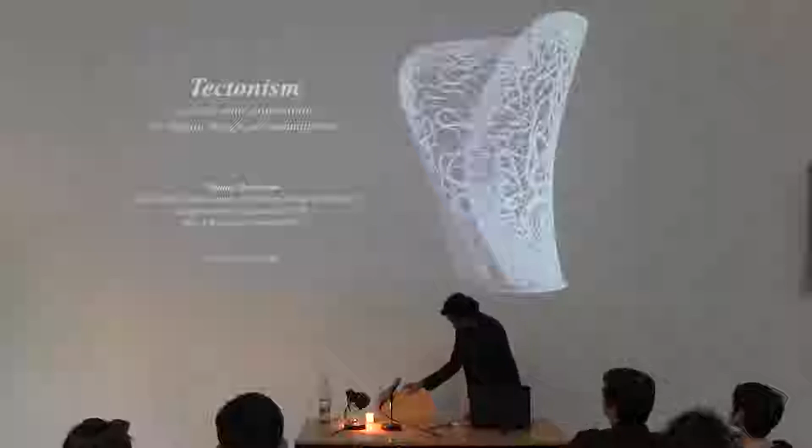Does this work? Yep. Thanks Johan for the invitation and also for being very accommodating to my erratic schedule. And thanks all of you for turning up earlier than your usual.

Hopefully this is the first of many visits now. As Johan mentioned, I was Theo's first student at the DRL when he was a tutor, before he went on to become director a year later. When I first met Patrick after DRL, he was on a sabbatical at that time, I was just happy that someone could give me a job on the things we were all really excited about, the early days of digital design in some sense. The discipline had already invested maybe 10 years by then, but I was just grateful that somebody thought I could even lead a team without being tested, and for that I'm always grateful to Zaha and Patrick that they have allowed me to grow and learn with the job.

So in many ways, all of the affiliations that I have since fostered, whether it's at the DRL or at Block Research Group or studying at University of Bath, stem from that desire to be a true polymath, in the sense which I think architects should be and traditionally were. A kind of polymath not in the sense of being expert in everything, but having enough knowledge to be able to orchestrate and talk to many collaborators and many disciplines that are necessary ingredients to produce architecture.

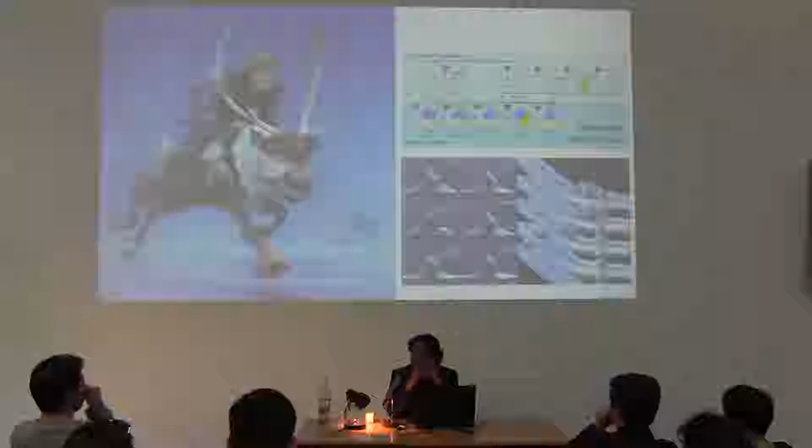And you can see over 35, 40 years of work, now any Pixar movie competes not only on the technological aspects. There's a lot of technology that goes into making a computer animated movie, but there's also a lot of storytelling aspects, a lot of emotional aspects.

And how many disciplines come together, many kinds of professions come together, and many kinds of constraints are seamlessly merged and woven together to tell the story.

So when you look at the movie, you're not concerned how the hell did they simulate snow. You're concerned mostly with what the story is being told, right? And likewise for lighting and so on.

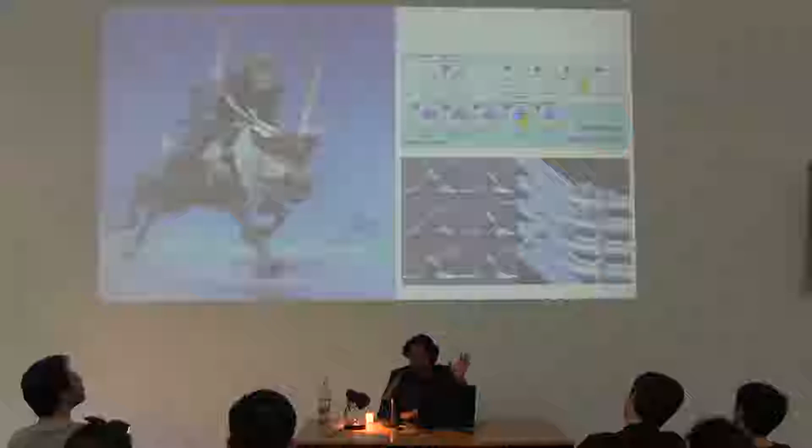So this is the kind of outlook that we have, or always had - this mandate to try and devote enough time to technology such that after some time we can suppress technology to privilege the social, privilege the storytelling aspects, and the delightful aspects of architecture, not just how things stand up and how things are made, but how people occupy spaces, how they navigate spaces, etc.

So in other industries also you can see this building on the substrate of technology, and when other industries have merged the social, there's been a disruptive change. For example, the automobile industry - Henry Ford and the Ford production line is legendary for how they organized the physical and how they organized the science of producing cars.

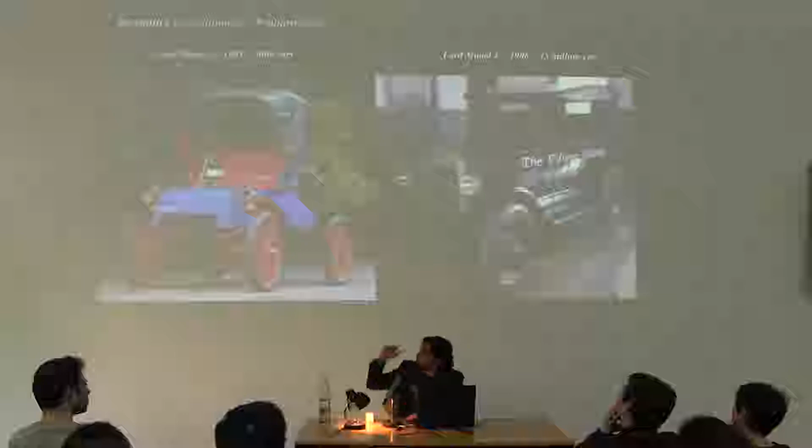Obviously, it is partly due to the production line and the assembly line, and also the service manuals and the service economy, all of these physical aspects. But also the genius of that endeavor was to position the car as a lifestyle object. It wasn't just a physical thing, it was merged into the social consciousness of people. It became something beyond just a vehicle.

So combining or positioning the car in people's lives has had effects we can still see today on our cities. Cities are dominated or planned for the car. Not to say that that's a good thing in the 21st century, but to say that by merging the technological with the social aspects, combining the production aspects with the consumption aspects, they've had disruptive effects.

Likewise, when you look at buildings produced by Gaudi and other architects of the time, they didn't try to promote these buildings as digitally fabricated or structurally amazing. That's not what Gaudi said. Even though underlying that is a lot of structural technologies of that time, a lot of computation, a lot of math, material progression, and fabrication aspects, like how to make instruments to describe things on site, how to cut stone, joinery aspects, and so on.

So there was already an economy of physical production, structural aspects, fabrication aspects, similar to our time now. We're saying digital design, digital fabrication, but if we realize the underlying production system is in place, and then if you're able to utilize this to begin to tell stories, to synergetically tailor our architecture to the social needs of people or consumers of architecture, we'll have a better chance of digital design being more disruptive than it currently is.

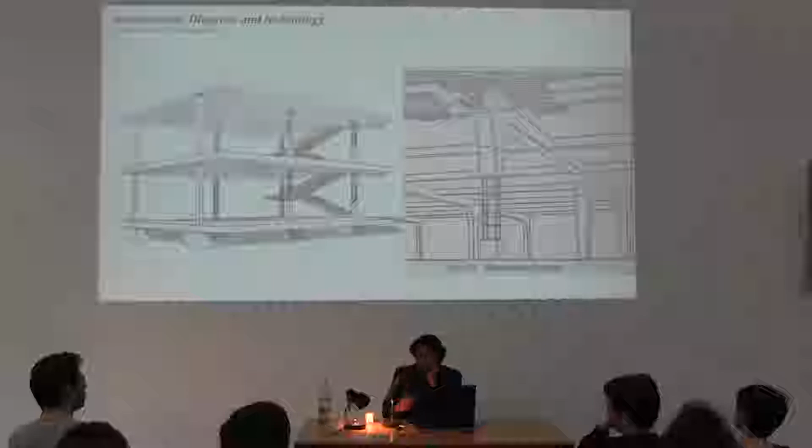Another person who clearly realized this is Corbusier himself. The phenomenal success of the Maison Domino as a diagram is also because it built upon technologies of that time, like the Hennebique patents on how to make concrete beams and columns and the entire concrete manufacturing system. But that's not what Corbusier tried to sell. He tried to build an architecture on top of the underlying physical science and physical technologies.

And lastly, somewhat of real heroes and sheroes for us are Ray and Charles Eames. They also early on invested a lot of time in the physical aspects, the material aspect. They bought this patent from the US Army about wet forming, steam forming of timber, and they installed one of these machines in their living room. They were a very materially based practice, but they were also invested equally in cutting edge digital technologies at the time, being one of the earliest adopters of Mathematica, or at least supporters of the software and that way of thinking.

But somewhere along the way, when they began to consider where that should go, when they designed the Case Study House or contributed to the Case Study movement, they realized that technology and the vocabulary of materials and techniques is only one part of a larger set of things that make up the puzzle. The other aspects are understanding of family, economics, production, servicing, distribution, and so on.

And we think we are at a similar stage right now, after 20 years or so of digital design and digital fabrication. We have a vocabulary of materials and techniques that we can now begin to apply to address more foundational concerns of architecture. So in that sense, that's why we think we need a language of architecture that is able to address these other concerns.

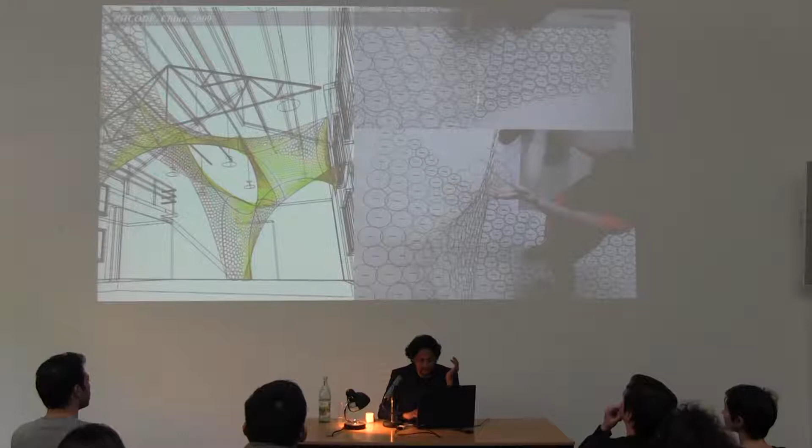Starting with the first aspect—a bit more scientific research into shell structures, digital design and fabrication—we started already in 2006 or so with this idea of digital fabrication. In 2006, digital fabrication meant a lot of manual work, meaning we assembled 2,000 of these circles by hand and stretched it together to make a formwork on which we intended to cast concrete. But we abandoned it midway because we realized it's better to do it in fabric. Rather than make our own fabric, we decided to use existing fabric and stretch it across bent pipes, then used that to cast concrete onto.

The benefit of this was that—and this was made with students and local construction help in India over a period of 10 days—complex geometries could be delivered on site, because the person who stitched all the fabric together did so in the space of this table. He had no idea what he was actually stitching. He brought the entire formwork in a small bag, and on site he stretched it, and by then the shape was already described, meaning the people laying the rebar reinforcements also had something to guide their work. So there were no real drawings made—the only drawings were for the unfolding pattern, and everything else follows from that.

So it's a kind of digital fabrication, but in many ways one of the key principles we realized is to simplify how things are described on site. If digital fabrication requires thousands of drawings, it's unlikely to be made. We did learn quite a lot about geometry and other aspects, which we continued. Around a similar time, a scaled-up version of this was already being made in London—bent steel pipes, more engineered, more structurally calculated and properly digitally fabricated. But the underlying principle is the same: you bend some pipes, stitch some fabric, and stretch the fabric into place.

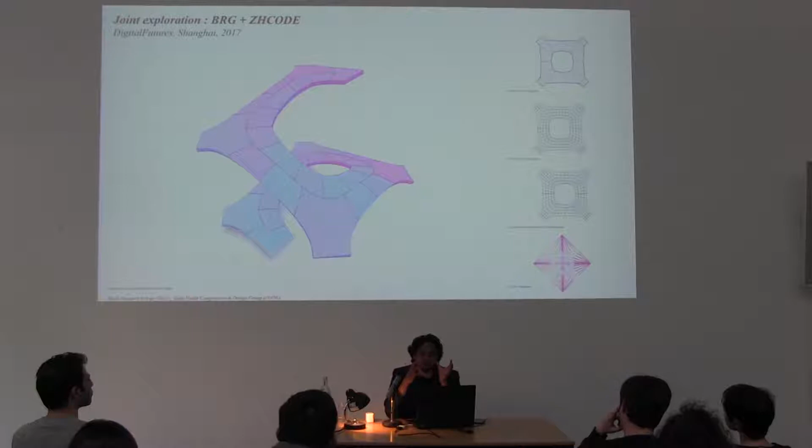As I mentioned, his PhD and his work relate to using computers to upgrade the same kind of techniques and tools people like Gaudi were using in the 19th and 20th centuries. The difference is these historically accumulated methods are very geometry-based, meaning you can calculate structural performance using just a compass and a ruler.

So it is very intuitive in the sense you don't need deep mathematical calculations, because it already accumulates all of that into a geometric way of calculating structure. So we see a greater synergy between the language we were developing with curvature and geometry-based language, and these geometric ways of calculating structure and enabling digital fabrication or processing of geometry.

And there's also deeper synergies with these physical models. You can see, with scale models, if this one falls, we know for sure the bigger one is going to fall too. So in that sense, these are not representational models, they are actually scalable models, and eventually that model did stand.

We're yet to build a fully scaled up version, but these are explorations by students. This entire model stands up not because of glue or anything, but because of the string going around the boundary, holding everything in compression by tensioning the boundary. So if you cut that tension tie, everything falls down, similar to the previous model.

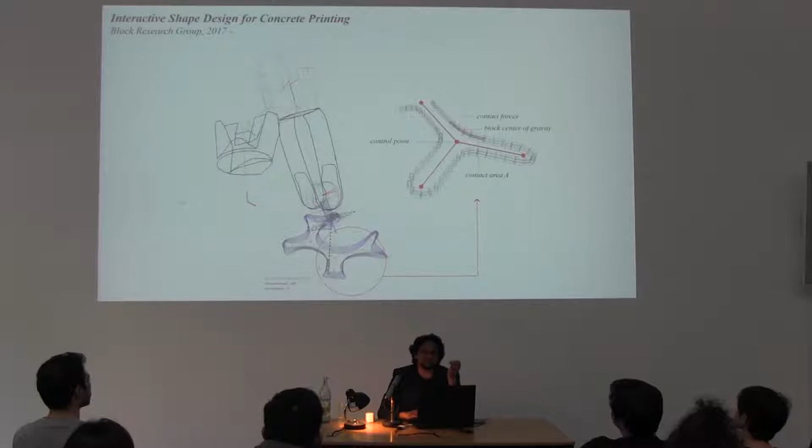Similarly, with 3D printing, we've been trying to explore this idea of how do you develop an intuitive way to compute structure and fabrication aspects. So we're saying, if you think of 3D printing as a scaled-down version of masonry, if you think of all the layers of concrete as scaled-down bricks, you could begin to capture some of the intuition that comes with assembling bricks.

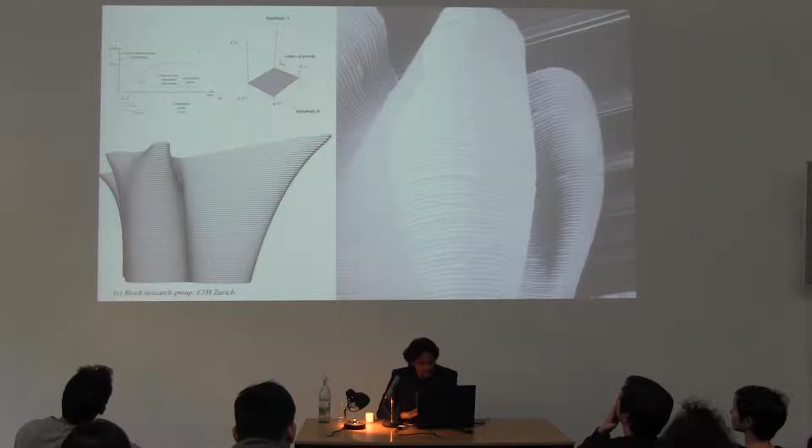We're trying to adapt methods from historic masonry construction to something as new as concrete printing or other clay-related materials. These are early prototypes, to see how far we can push this analogy between brick building and layers of concrete.

Alongside, we are also discovering new operations that the computer can add to this mix, allowing us to make more complex shapes which nonetheless retain some of the intuition of masonry construction. If you think of Nubian vaulting, where you lay bricks layer by layer, concrete printing is basically the same thing, just done by a robot in some sense.

We've been doing similar fabrication-aware or structure-aware geometry for other kinds of fabrication methods. This is printing in plastic, where the underlying shape is cut by a robot, the formwork is assembled, and then you print on top of the formwork.

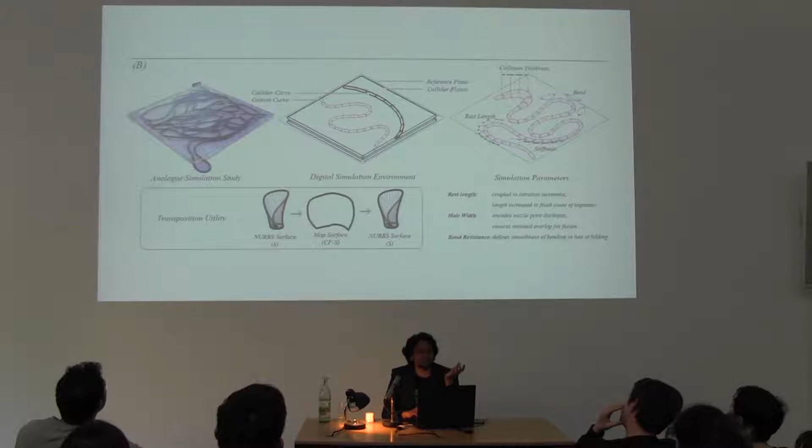Again, we try to do physical tests, and when you do that physically, you're able to devise a computational workflow that captures some of that intuition, so you can build very quickly more complex things from very simple initial experiments. We were then able to use robots to do the printing on top of the formwork. So all of these complex workflows we put together start from a simple physical experiment.

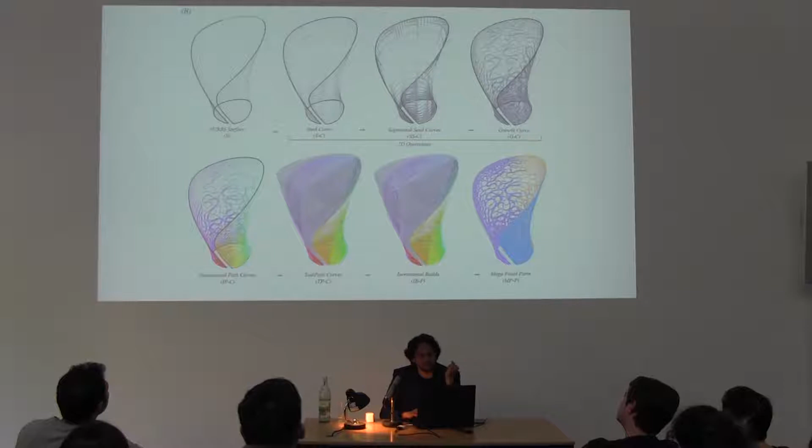And this is how the robot then printed on top of a form. You can see the forms were hot wire cut, hot wire cut by a robot, and then the printing was done by another robot on top of that formwork.

You wouldn't have seen that it is a complex process like this if you just saw the shape. That's our intention, to make it seem seamless. And this entire project was done in a space of 3.5 weeks, and the hot wire cutting manufacturer was in Denmark, the 3D printing manufacturer was in London.

There was not a single drawing made. Things were just hopping from one computer to another, from one robot to another, and that's one of the key aspects of digital design and fabrication. You have to orchestrate and manage all of these exchanges between machines and between people.

Similarly, for 3D printing at a smaller scale, in this case, these patterns have a structural meaning. And this utilizes a technology called topology optimization, which basically reduces material from where it's not needed. Similar to our bones, it will put material where there is more use and more structural stress, and remove material from where it's not needed.

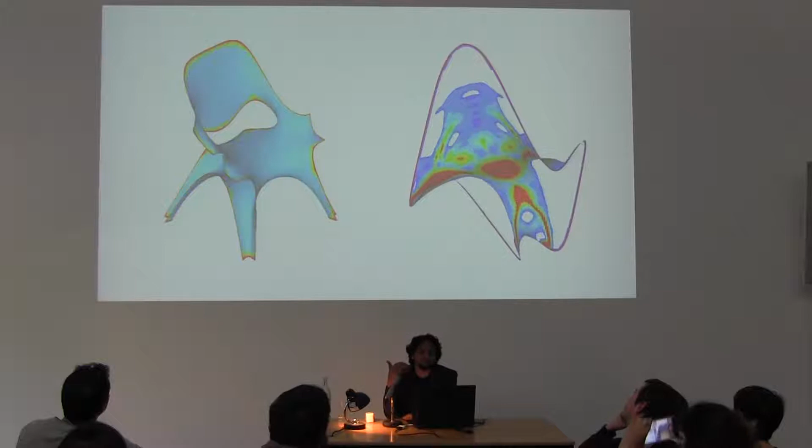So in many cases, you can remove up to 70% of material for the same structural strength. So you're basically making a lightweight version of the same geometry. So in the previous images, we wanted to highlight these things and to develop an aesthetic language around these optimization and fabrication processes.

And similarly with origami, we've been doing sheet metal manufacture, trying to rediscover historic techniques in origami, curved origami in this case, not straight line origami. So the principle is exactly the same. Instead of a straight cut, you put a curved cut, and you can get curvature for free.

And this used to be taught in the Bauhaus, and even historically in many of the construction schools. Currently, a professor at MIT is exploring how to computationally and digitally recreate these processes.

So equally, mathematicians are interested in origami, David Huffman on my right, and artists are interested in this discipline, like Ron Resch on my left. So these are kinds of disciplines and endeavors that we're very much attracted to, where there is not only science but an art aspect, and so both kinds of explorations are synergetically contributing to the progress of that tectonic language.

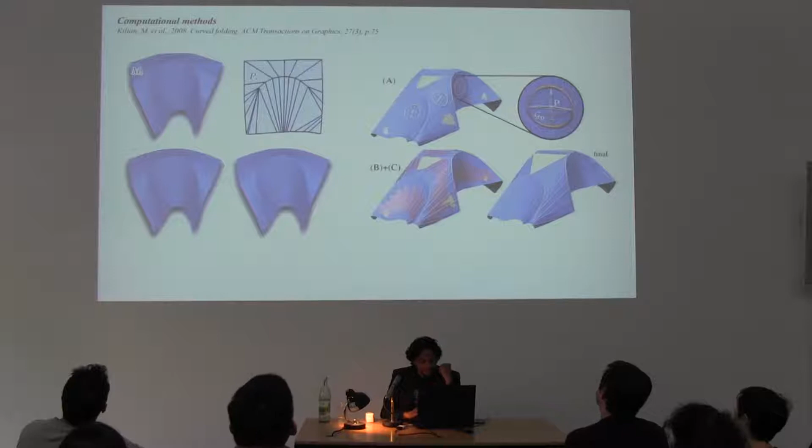But the simple idea is this: you have to capture this intuition. You cut away material or put some lines, score paper or metal, and you fold it. And as a designer, within half an hour, you can create all of these varied shapes, which already incorporate how it's going to be physically made. So the shape has not only structural meaning in the fact that you can fold it, but also physical fabrication meaning, in the sense that you can scale these experiments from paper to metal, which is what we did.

Again, with students, each of these eggs was put together in a matter of 4 hours, and all we needed was a laser cutter that cut sheets of metal, and you fold them together and assemble these kinds of shapes. And of course, there's a lot of computation involved, but we want to suppress those aspects and capture the intuition of physically working with these.

So I did my M.Phil on this topic of curved origami, to try and capture some of these underlying production systems associated with origami, and therefore we were able to put together a kind of workflow to create this large installation for the Venice Biennale in 2012.

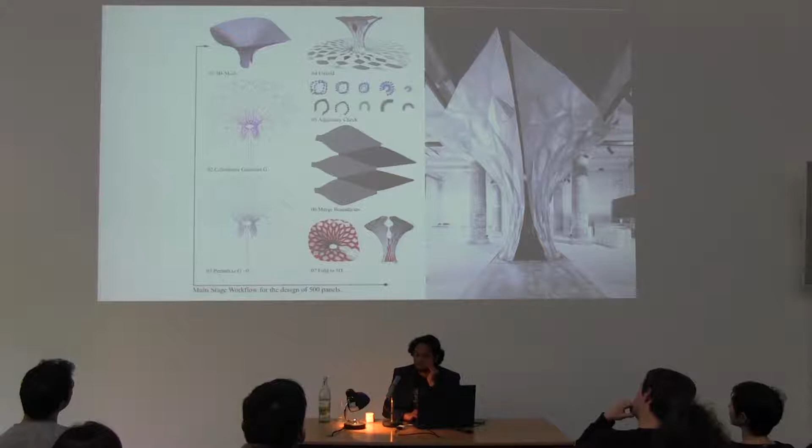It contains about 500 panels, which are all curve folded and assembled together. What you don't see in that simple structure is this complex digital design and fabrication process that has to be managed seamlessly.

So that's curved origami, and likewise we've been doing new things exploring stone manufacture with carbon reinforcement. So the black is carbon fiber and the white parts are stone.

Again, this combines tectonic ideas coming from the Wegner chair, and also structural ideas coming from the tension experiment that I previously showed. So this structure is held up only because of the tension tie that goes around the boundaries. So if you cut that tie, everything comes down.

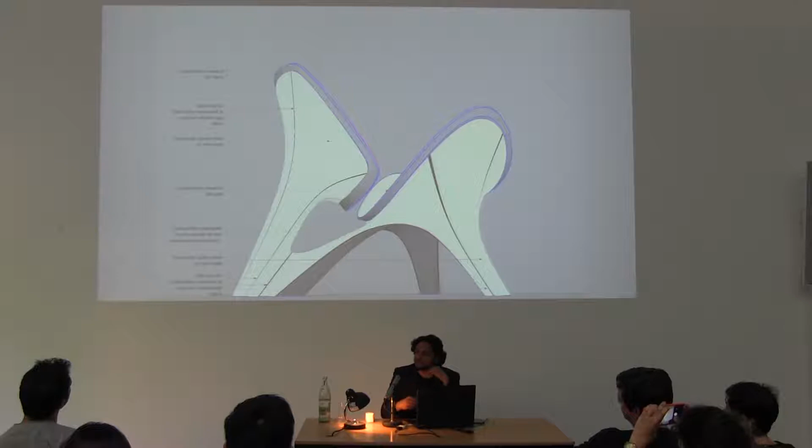So we've been exploring these kinds of ideas of manufacturing and structure, and how we can synergetically combine that into a kind of aesthetic language, to heighten and physically express these aspects of structure and fabrication.

So you can see those cut lines are not arbitrary. They're there to heighten and express the structural flow of forces. And the carbon fiber is on the inside where there are tensional forces, and the stone is on the outside, which is good in compression. So that's the kind of exploration that we like to conduct.

Similarly with this pavilion, lots of manufacturing constraints, spatial constraints, aesthetic constraints, so on and so forth. But what's interesting about this is just one person from our team is able to manage all of this complexity. So just to highlight that things are maturing so quickly, what used to take entire teams and months of research and development are now being done in a matter of weeks and by smaller teams, meaning we can do something else with our time.

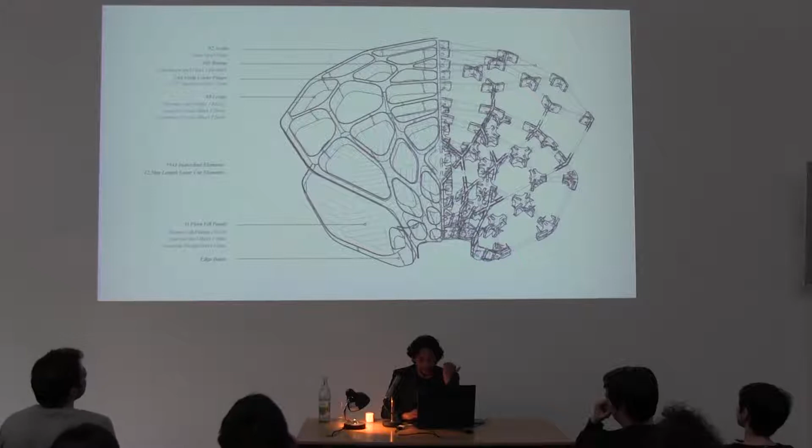Again, some of the structural simulations, and also how to make sure everything can be unfolded, so you can bend the steel skin onto a steel underlying structure. So there's a lot of fabrication complexity which we want to deliberately kind of seamlessly hide, but heighten other aspects, the shape aspects, so on and so forth.

And again, even to this day, digital fabrication still means a lot of manual work. So this was produced in China. The first version was produced in Germany. The second and third versions are being produced in China.

So all of this, in many ways, these experiments and prototypes are deliberately not acknowledging the architectural side of things. It's to suspend disbelief, that once we get those aspects under control, we can begin to address more architectural concerns of program and spatial aspects and so on and so forth. So this was...

One of our first major projects for my team, which unfortunately is currently on hold. We started design work on this already in 2013. We've kind of tried to heighten all of these aspects of structure and fabrication and ornament, as I mentioned. Behind the scenes, there are all these computational workflows, ideas of BIM. It would have been, if it were completed, one of the prime examples of digital design and fabrication maturing.

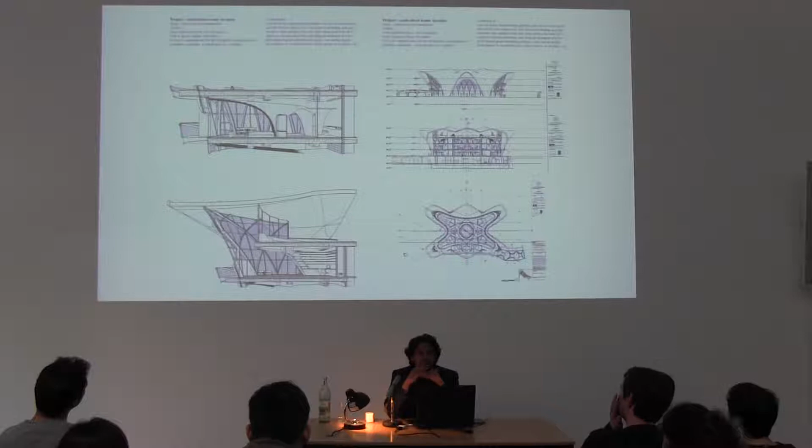But regardless, the status quo, regardless of whether projects like those have been manifested, is this: research units like ICD in Stuttgart, or Philippe Block in ETH Zurich, or CITA in Denmark, all these places are already knocking on the doors of doing these kinds of pavilions in time-efficient ways and financially efficient ways. So there's also a kind of new aesthetic associated with these digital design fabrication methodologies.

So in other words, you see more of these pavilions pop up across the world. It's not only in these elite, state-of-the-art research institutions, which begins to beg the question: how can we apply some of this research into commercial projects? Like we did, again, my small team of 4 or 5 people worked on this gallery for mathematics.

Which we completed, and which we are calling an interim result, because it's an interior application and it's a small gallery of 1,000 square meters. But regardless, it was managed by like 5 people, and since the time it has opened, it's already invited like 1.2 million people to the gallery for mathematics. That's quite a lot of people.

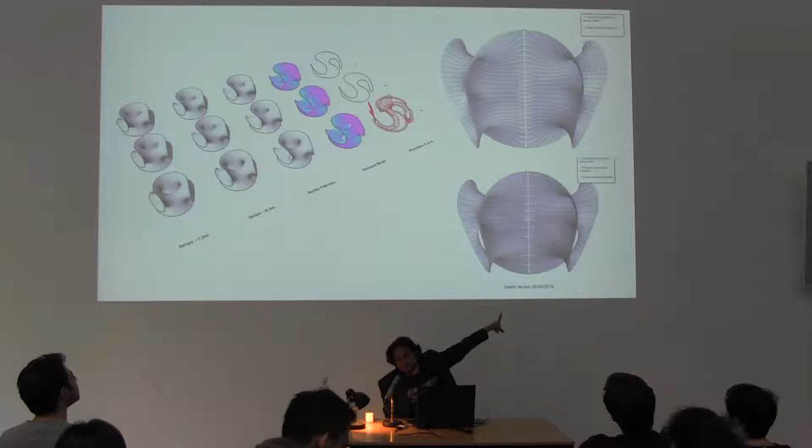So the fabricator originally proposed this kind of fabric layout, which we found ugly. Because we had made a previous physical model and had all this prior research, we could propose to the fabricator and the engineers that we could actually make the seam layout as described in the image above. The final layout was like a negotiation.

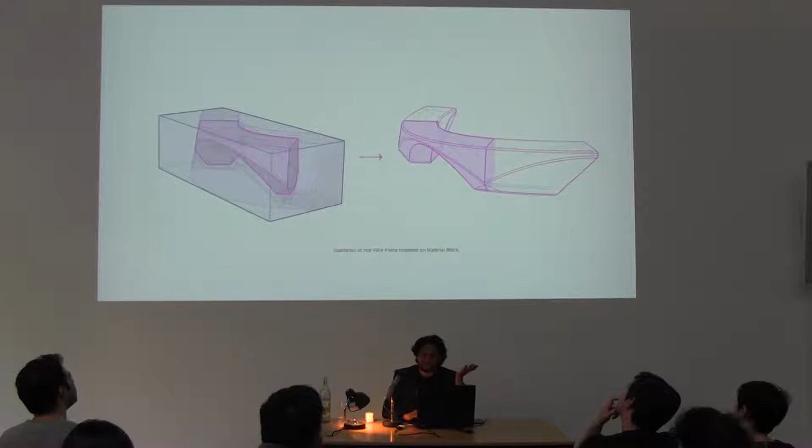Likewise, for the concrete benches, instead of stone, it inherits a lot of stone cutting techniques, but instead of stone we use foam, and instead of human labor we use a hot wire cutter or abrasion wire cutter. The logic is simple: it's upgrading historic stone cutting techniques using a block of foam. You use a hot wire cutter to cut away everything that's not the bench.

These are the various cuts from a block of foam until you get the bench. Then the foam is cast and the concrete is cast on top of the foam, and all the pieces are assembled like so. There were 16 odd benches in the gallery, each made by one designer, a few fabricators, and lots of robots.

This highlights the distinction between traditional means of production, which means you have to invest a lot of upfront design time, but the actual production processes are much faster.

So those are the benches that got made, and we're particularly interested in exploring this kind of tectonic or geometric language. Those cuts are not arbitrary, those curves are not arbitrary - they're there for either structural reasons or for fabrication reasons. So here's both of them put together.

So to conclude then, this kind of project-independent technological research allows us to do many more projects, right?

So we did this as a small gallery installation where the fabric comes down wherever people are not there, enclosing them. How do we measure where people are? We just track where their feet are - there's a laser that scans people's feet, and that's how we dynamically bring down the piston where people are not there.

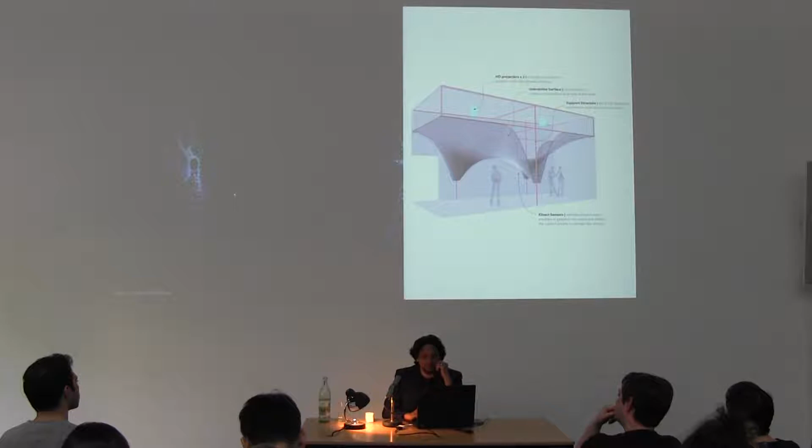It was reasonably successful - reasonably because it was small, and not many people actually saw it because it was on the side of the main exhibition.

But we felt confident enough to use this similar technology to manage the stage for Così fan tutte, which was our contribution of stage design for the LA Philharmonic.

So for every stage of the opera, some parts of the fabric would come up and down, and the actors and singers would walk around on stage. This was in the US, so you can imagine the kind of health and safety nightmares you had to go through.

Likewise, we feel so confident about these technologies now that we proposed a kind of school for refugee children. Unfortunately I cannot tell you where it is for political reasons, but the idea was that we would develop all the digital design and the shop drawings and hand it over to the local fabricator who can deploy these schools across the region. This project is kind of held up because of political reasons, but we felt happy enough that at least some children were able to use these spaces before the winter came.

So again, to highlight that technologies are advancing so quickly, and that most offices have a good handle on all the complexities of digital design and digital fabrication, we can begin to address other social causes now. In other words, it's a period for asking what else can we do with this stuff? What other questions can we ask?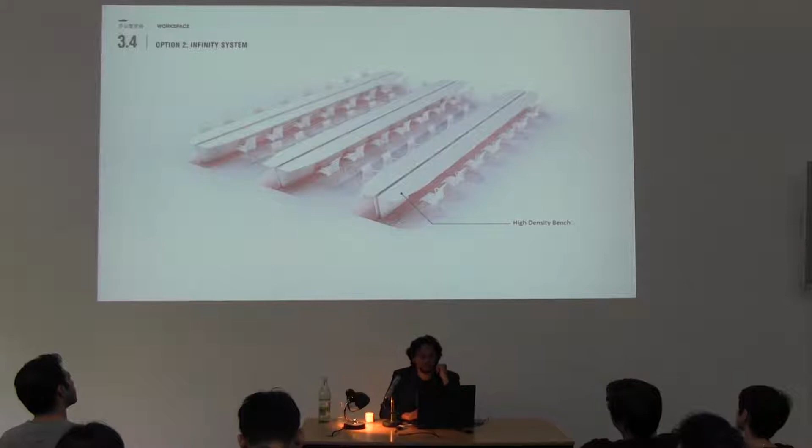So in office spaces of this completed project, we are now going back and beginning to measure office layouts, like how can we design flexible office layouts to account for meeting spaces, dynamically rearrange meeting spaces, and also address relationships between people within a team. So how can you design furniture to address how teams work and not work?

And where? So we're also beginning to measure from where you sit, like how many people can you see and how many people can you actually interact with. And we've already developed the language of curvature.

We're now beginning to measure socially what is the performance of this curved language. Previously we were saying curvature is good structurally, curvature is good for fabrication, and now we're beginning to say, once you have this language, how can you then use it to organize office layouts or spatial layouts? We are finding that curvature definitely offers more degrees of freedom to organize these kinds of social, organizational layouts.

Again, these are the lower hanging fruit, obviously, because it's easy to measure these kinds of things. The other pet project for us is this idea of housing, not in the sense of affordable housing alone, but the social aspects of housing, meaning communal aspects of housing, and how can you computationally study how communities operate. So this is work with students of ours at the DRL,

where one student team decided to address these communes that already exist in London. There are 4 or 5 of these communes of artists and manufacturers and other kinds of vocations.

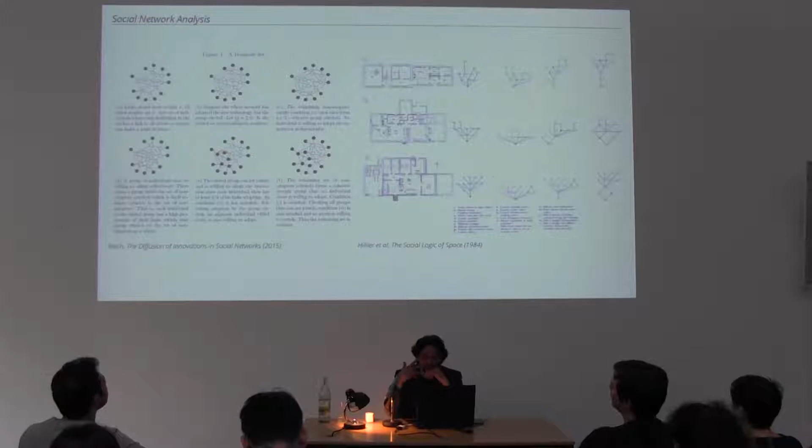And to that, they're applying the science of social networks, like Facebook, which is in the news for all the wrong reasons currently, but you can use the underlying social technology and analysis technology in a positive way as well, combining it with the historic work of Bill Hillier and others at UCL, who understood physical networks using the same mathematics, let's say. So how do you bring social networks and physical networks together?

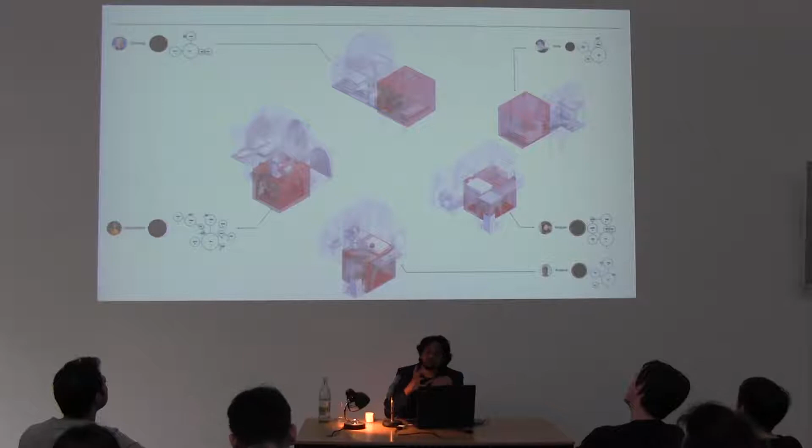So this particular team mapped out a few people in a given community and then tried to design spaces specifically for that community. So to computationally investigate social networks and then produce physical networks that harmoniously house these people. The names are changed, obviously. So again, applying the same rule-based, computational way, not only to address the physical aspects, but now to address the social, relational aspects.

How do you position people? Where should someone's house be? This used to be a very central task of an architect - how do you organize social relationships in villages? Like the head of the village would be in a certain place and so on. So it's not to say there needs to be hierarchy, but there is a relational marriage between the social structure and the physical structure of spaces.

And obviously they're trying to combine technologies of digital design and fabrication with the social side. So this particular team was trying to build on the ideas of clay printing and concrete printing, whilst also progressing the social analysis aspects. And these are the hundreds of studies that they did on the physical side.

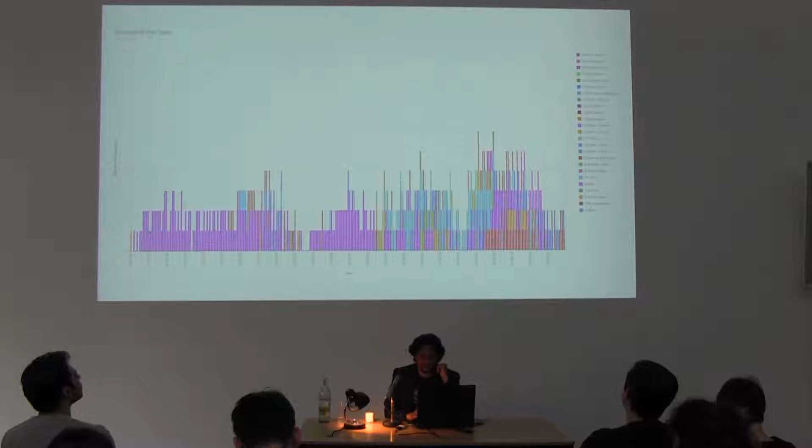So we are also collaborating with a housing developer slash provider, and trying to see which parts of their buildings are used when, how often, so on and so forth. You can see there's event space, kitchen, bistro, cooking area, play area, and so on. So we are beginning to collect this kind of data to know whether you actually need a living room or not.

And what's more important is to then visualize or make use of this data to say, how do you promote more engagement between people? How do you ensure that the architecture you propose allows for greater interaction between people? So we are trying to say, if a person's daily schedule is A, B, and C, and he or she has to go between these many rooms, can we force intersection of these paths? Can we force people to accidentally discover each other by the way we arrange these spaces? So that's the kind of intention. This is still early work, but that's where we're going.

And we're beginning to also address more developer concerns, like how do you then sell these things, and so forth. But at the same time, we're trying to utilize all the language we've previously developed to combine with these kind of data studies, because data on its own doesn't mean anything unless you physically manifest it in some sense.

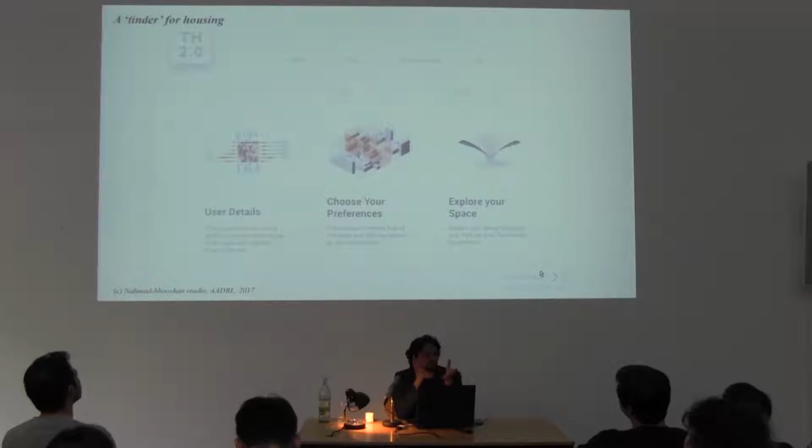So the ultimate aim, I'll leave you with this video, is to make a kind of Tinder for housing, where you not only are able to choose your house, but you can also choose your neighbors, which is more important in a social sense. Most people would like to live with their friends, obviously, but in contemporary cities, if you are buying a house, you have to buy where things are cheapest.

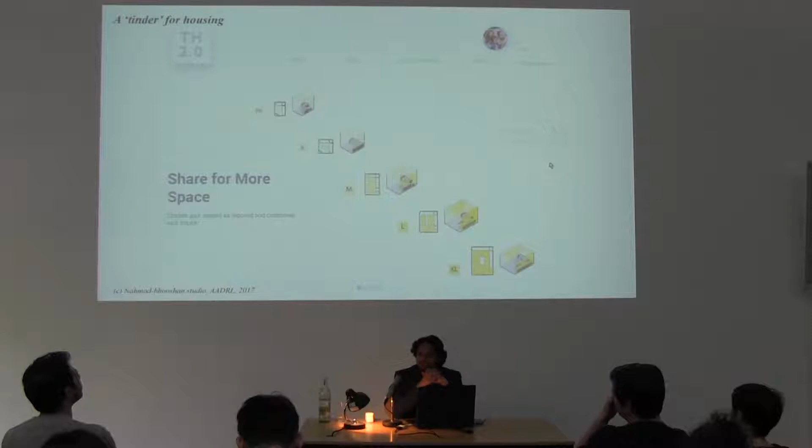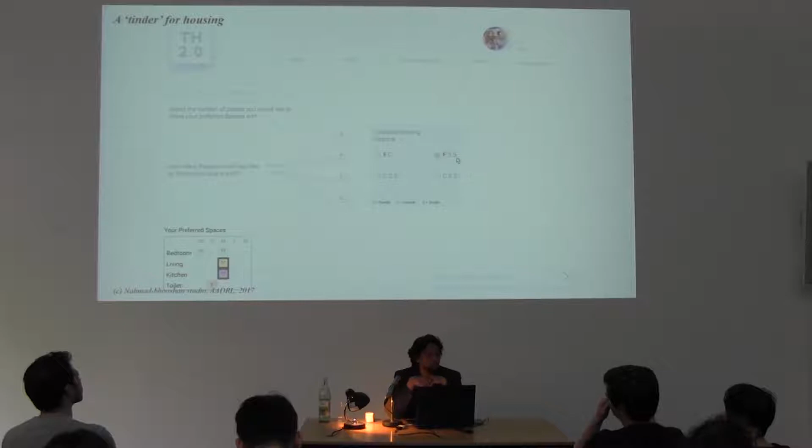So we see affordability in a slightly different way: you should be able to afford to live with your friends, and how can we utilize and leverage technologies of data and digital design, digital fabrication, to actually deliver social housing of this kind. Not social housing from the post-war times, when social housing meant mass deployment of prefabricated units. Here we are saying customized units, customized to groups of people, and so on. So that's our hope. I'll leave you with this video.

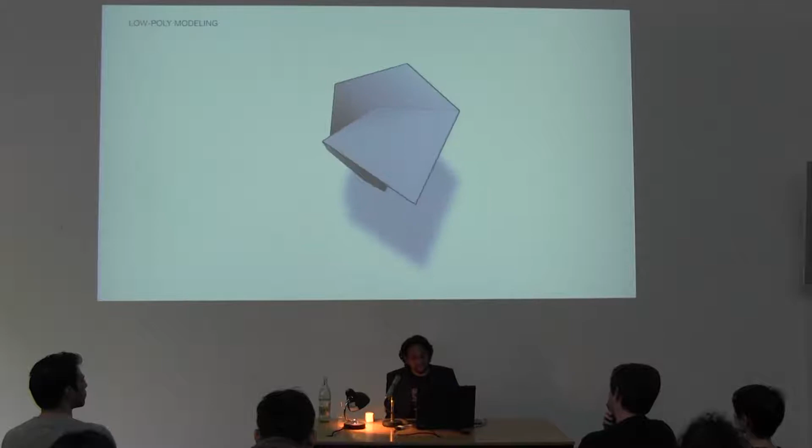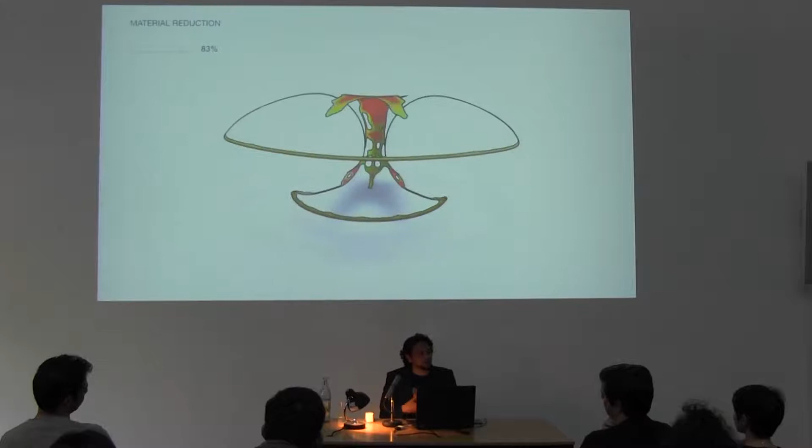Thank you very much for the question. Definitely we think that digital—people, society in general, are not so comfortable with the digital realm, and there's anxieties about robots, anxieties about AI, anxieties about data. And there's a kind of backlash to say, oh, we want buildings the way they were built 100 years ago. But we think the answer is not to go back 100 years, but to look at what happened 100 years ago in terms of principle, and to position digital technologies in a way to address social concerns. That's definitely what we want to try and do, to address the utopian questions again, because there's a lot of cynicism that has crept in, which is not necessarily true of the technologies per se. It's just how it got implemented. For every bad Facebook story there could be a positive story of using the data, and you can obviously keep it anonymous, and privacy matters can be easily addressed.

We think people are willing to give up data and contribute if they see the social benefit of it. If we can say we can leverage all of this technology to help people live together, live with their friends, at least we think there will be some set of people who will want to try this as an experiment.

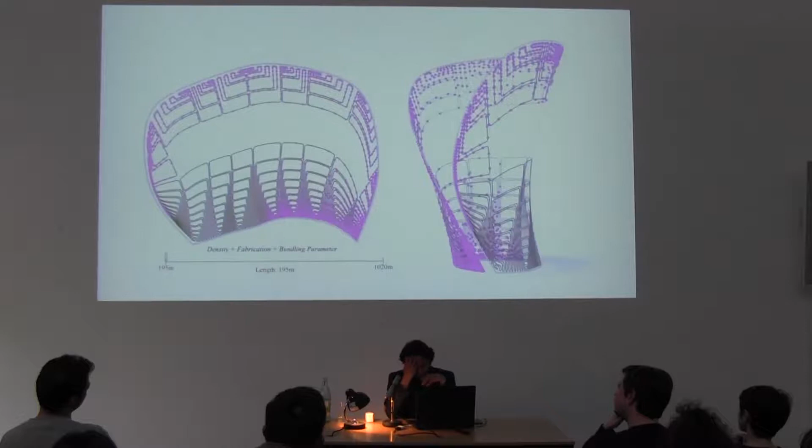We don't know where that's going to go, but in some sense it's not so utopian, because in cities like London it's already happening, where developers are building rent-only housing, and what they give in return is like a kind of membership, like you get a gym. If you're a startup company, you want to live where other startup people are, because that's where you'll find your collaborator. You're not going to find a collaborator living outside the city. So that kind of housing is happening, where people are going directly to startup incubators and saying, you already put these people together and they're working together, so why don't they live together? It's kind of like co-work has also mutated to co-live.

That's the social phenomena that's already happening. And we think if we don't ask the utopian questions, that's going to end up in another kind of Facebook nightmare. So we think we should ask the first principle questions, otherwise we might leave the door open for cynicism.

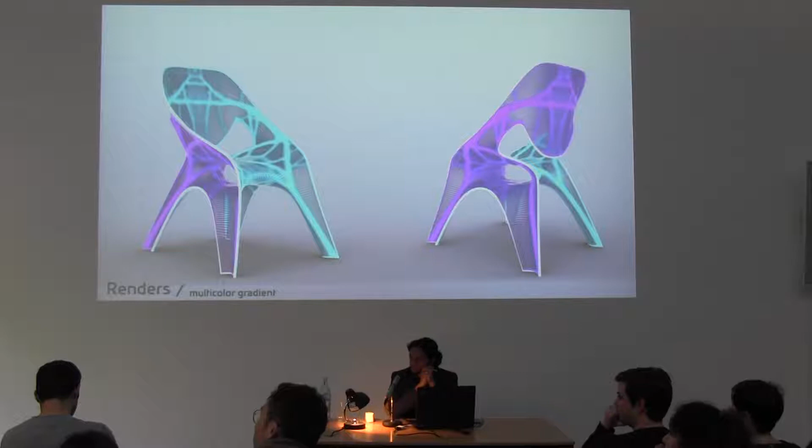How important is context in designing housing, for instance? How do you bring vernacular architecture together with computational design?

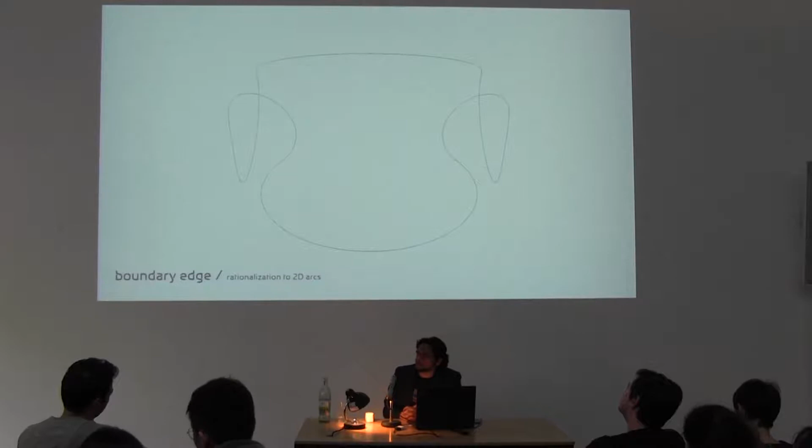For us, ideas of vernacular are somewhat abstracted to these principles of structure and material, and environmental aspects, and also social aspects. So vernacular to us is not a style that we have to recreate, like Victorian style, but this is indeed vernacular in the sense that the data is specific to the people, or the material, the expression is specific to the material that's available. And material and structure have always gone hand in hand, like the churches of previous years, or mosques, and all of these religious buildings that society invested in.

That's what made it vernacular, we think. That's what tied it to place, that's what tied it to the community. So vernacular in that sense is the science of vernacular, and you can always abstract and computationally enhance it, like we've shown. That's why we work with Philippe Block, who works with historic graphical methods of calculating structures and adds the secret sauce of computers to it. We see benefit in using these techniques if you can tie it to community, because that ties it to place and time. Essentially that's what vernacular is, right, tying your architecture to place and time. So we share that interest in the vernacular, but vernacular should be also 21st century vernacular.

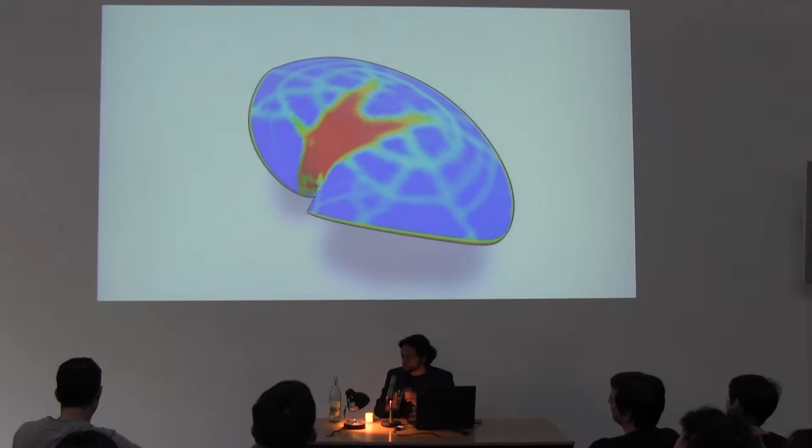I have a question about the idea of producing this kind of lifestyle. Is the social concern only for the result, for people to come and use it, or is there some involvement of people in the production process as well? I'm referring to a story you mentioned about the AA visiting school in India, where there was a guy sitting on a 2x2 table who just stitched everything together, but had no idea what he was going to do with it. So is there any attempt at looking at those ideas of social concern? Because in developing countries like India, where it's so labor intensive still, how do we approach those situations of design?

Absolutely. In the sense that the kinds of examples I showed you, one is fabric forming, the other is metal forming, and we pick these topics or technologies of making when they are synergetic on multiple axes or dimensions. So there's the craft aspect. You could use a robot and have really digital design fabrication of one kind, or if you're in a different economy, you could also use your hands and the craft and labor that's available, and the historic building craft that's accumulated in any region.

I was saying similar with stone cutting, if we don't have the skill in London, that's why we sent it to be hot wire cut somewhere. But if we were to build similar things in India or in Mexico, where we have built a few things, we definitely rely on or try to incorporate the local building industry into the mix.

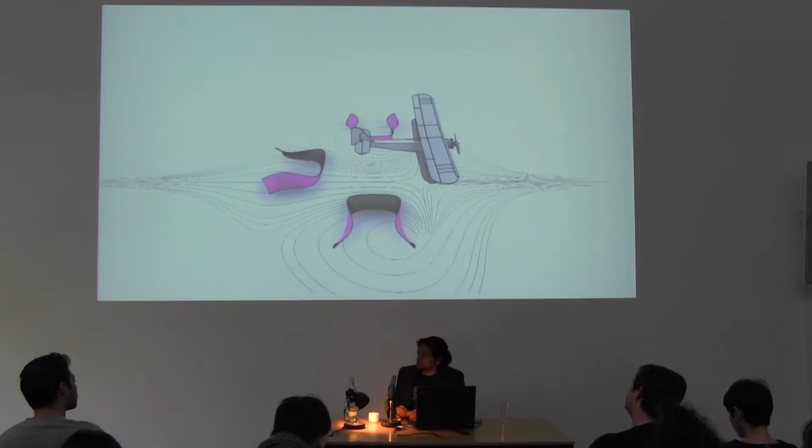We don't know what happened to all the crews, but we do know about the workshop we once did in India. There was a student who then made a business out of selling fabric-formed houses. He now has a business where he took that idea, kind of trained his own workers, and contacted Philippe to ask how to compute these shapes. He has a business now—I don't know how successful it is, but yeah.

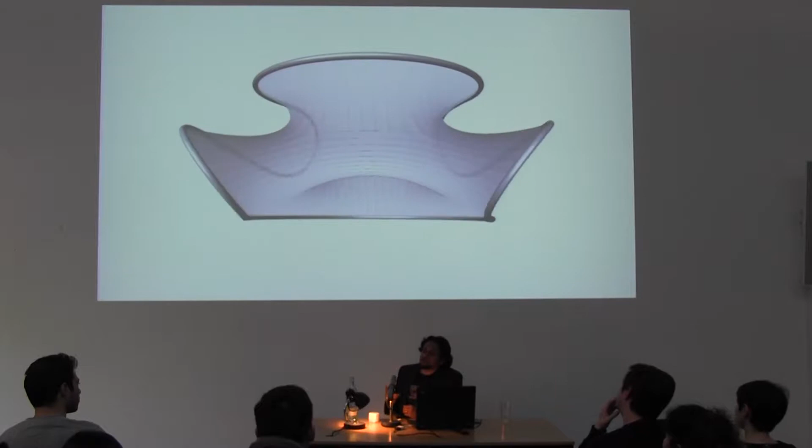And similar with the sheet metal forming, because once you unleash that idea as an intuitive idea—you just score and you fold—people can take that anywhere they want. For us it's interesting to take it in a computational way, but there are others who can take it in a kind of artistic way, as they've already done.

That's why I try to mention that it was taught in the Bauhaus. There was a handbook of curved origami to explore shape making in relation to the material, or in relation to the geometric technique.

So what we're trying to do is remove the taboo of shape, as though—clearly there's a taboo associated with complex geometry. If you ask any student, and we've done workshops all over the world, they're deeply fascinated by shape, but if you ask them they'll say oh no, we're not interested in shape for the sake of shape. There is a taboo, as though you need some other qualifier to explore shape, which I think misses the point.

The point is to get enough control over shape so you can use that to do other things. Other things could be engaging the local economy, simplifying construction documentation, simplifying construction procedure, saving material, whatever it is—because you can't do all of these things with boxes. That's a simple way to think about it. You couldn't possibly address complex societal requirements with simple geometry.

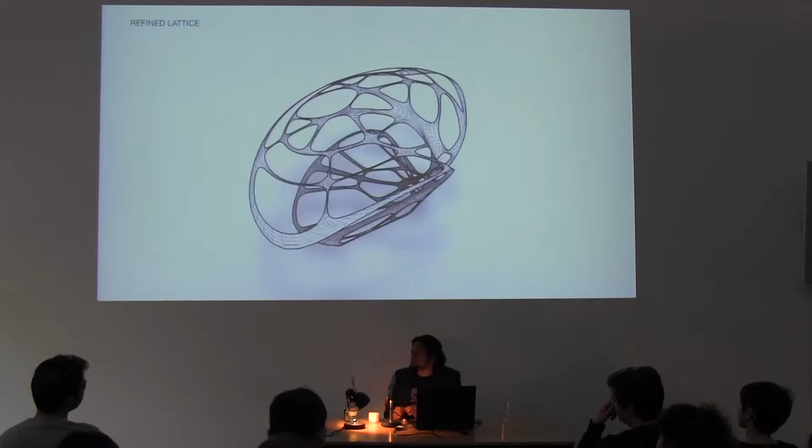I really enjoyed your presentation, especially the two installations that involve robotics and the textile—specifically the one that was kind of a symphony, involved in the theater. I was wondering, were the movements also controlled by the music?

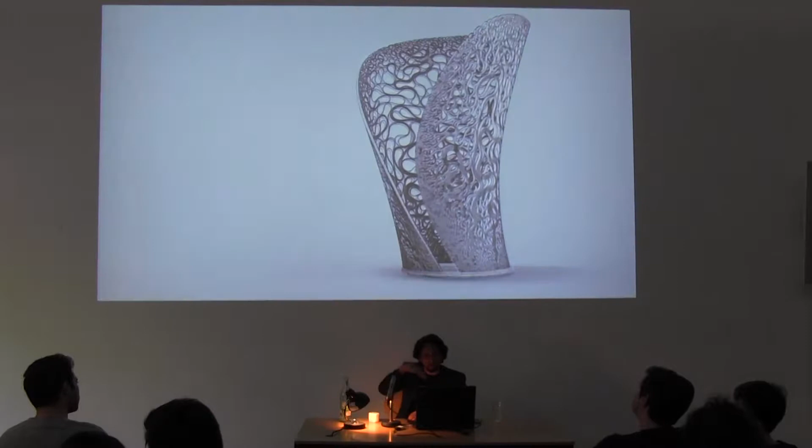No, it was more curated. It could have been, because it's entirely digital and there are motors—it wasn't manually pulled, it's all digitally controlled—but for various reasons it wasn't controlled by music. First of all you want people to be standing on it and singing, so an opera works in sets, or scenes as they call them. So it was between scenes that the singers would get off, then the stage would change, and then they would get on again.

So it could be, but it wasn't. It was already programmed, with a specific time, and performers were also involved. It was programmed, and when the performance got off, someone hit a switch.

Yeah, I enjoyed it very much.

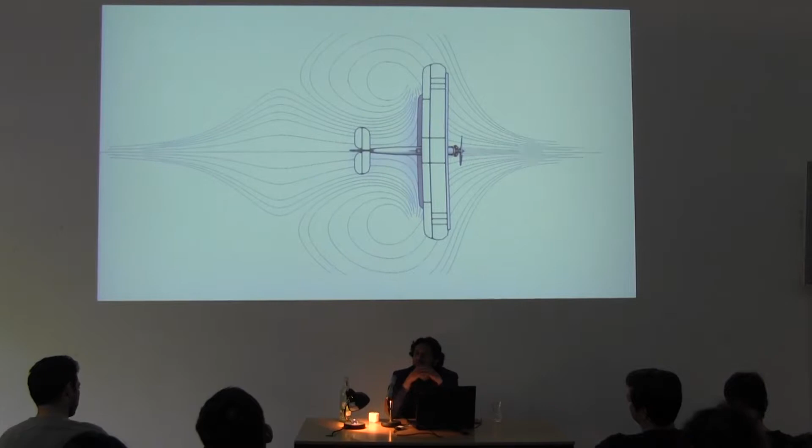Yeah, no, I mean, exactly, like Galaxy Soho - that's one of those kinds of projects that we are now beginning to question internally also. There are many successes that the project delivered, like remarkable speed of construction, technological advancements, and also upgrading the real estate value of that area, and so on and so forth. Similar to the BMW factory, etc. And also in Seoul, the Dongdaemun Plaza. But that's from a previous stage of our company's work.

So architecture moves somewhat slowly, because construction takes its own time. Whilst that is happening, we have to celebrate its successes, but also be critical, like the kinds of questions you were asking - why was it that the top floors were not originally occupied. So that's why we're now looking at these kinds of ways to measure potential successes, like would it be occupied? Because previously no one asked that question - the developer wanted X square meters and we delivered X square meters.

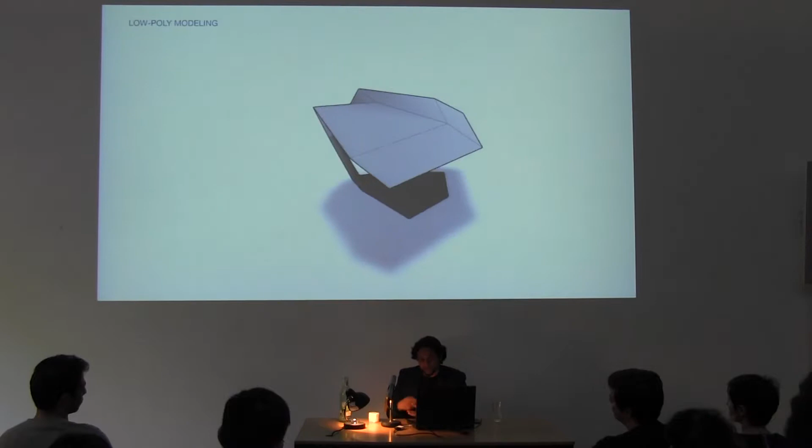But now we're saying, how do you socially activate these spaces? We need a computational way to measure or at least understand the phenomena of social activation. So we're at the early stages of doing that, but regardless, we think we shouldn't just put our finger up in the air and intuitively figure this out - we have to study it as rigorously as we have studied the physical side.

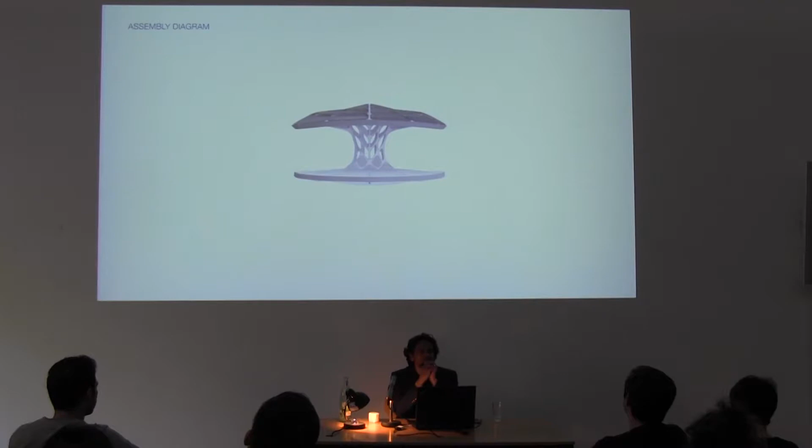So thanks a lot for really amazing work. What I particularly like is that there's this really productive tension between creating variation within the shape and at the same time having a sort of repetition that makes it recognizable as a style. I wanted to refer to the last two projects you showed and how you see this tension coming into the social aspect. Because on one side you have a building where you're trying to increase interaction as much as possible, and on the other side you have this Tinder for home, which somehow builds communities where I live just with my friends. It kind of brings up this ghost of living in a happy community with all my friends and having no idea what happens outside. So I don't know how that tension that creates your work plays out on, let's say, a geometric fabrication level.

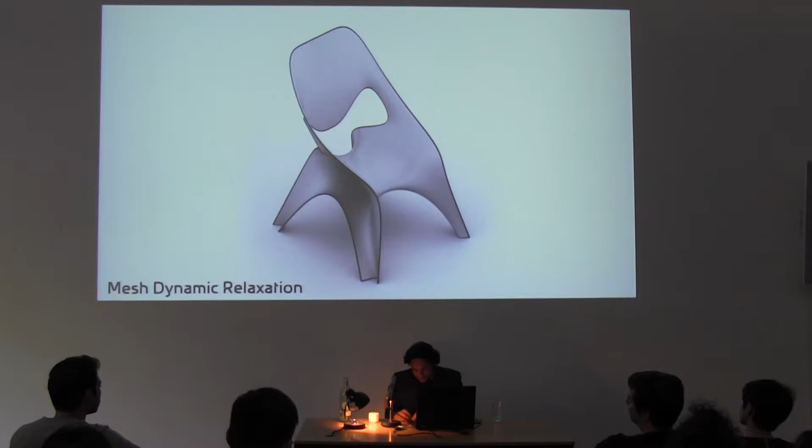Yeah, it's definitely true that we don't know where it's going to go, but we know people want to live with people they know. How much of the people you don't know do you want to meet in a day is a personal preference, obviously, and a certain amount of that is necessary for society to function. But if you're only meeting people you don't know, then that's also not so good - maybe that's even more disastrous than living with only people you know. So there is that natural tension there.

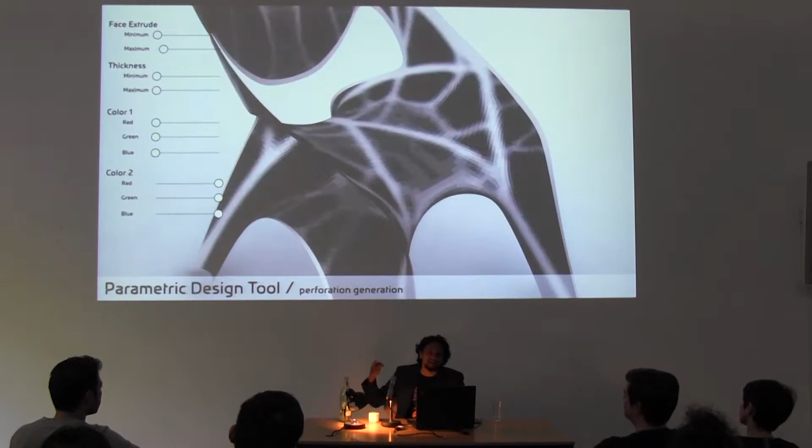So it's the idea of mass customization, right? It's mass customization in a way - the ultimate mass customization where every individual user is a market on his or her own. So there are as many markets as there are people. One level higher is that there are like a tenth the number of markets as there are number of people, and that's already better than previous stages where it was mass produced - there was one house for all the people. So it's kind of trying to operate at that scale between how many different types of houses do you need.

Like every house is different, or all houses are the same. So those are the two extremes, and you can occupy any segmentation in between.

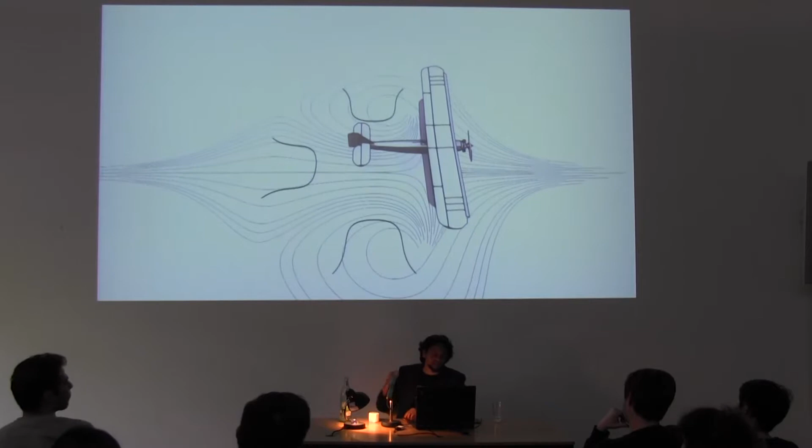But we do think that not all segmentations are suited for digital design or fabrication, because once you reach a segmentation where there's only 3 or 4 types, it's best you leave that to the developer, because they have mass-produced systems. Whereas on the other hand, if you go very fine, then digital design has no repeatability, and therefore there's no

gain economically, or you're wasting resources. So there's a sweet spot for digital design and fabrication, and the kind of segmentations you need depend on what is the size of the community, for example? Should it be 6 people or 90 people? We don't know, but...

So I was just wondering, considering there are a lot of practices within, let's say, people bounded by the architecture community, that use computational tools to various degrees. Would you say there are specific, since you've been saying that it's a point in time where it's matured to a certain degree, would you say you can identify now certain sub-genres in computation? And if yes, then is there a practice that you would say is radically different from the way you work? And then what sort of...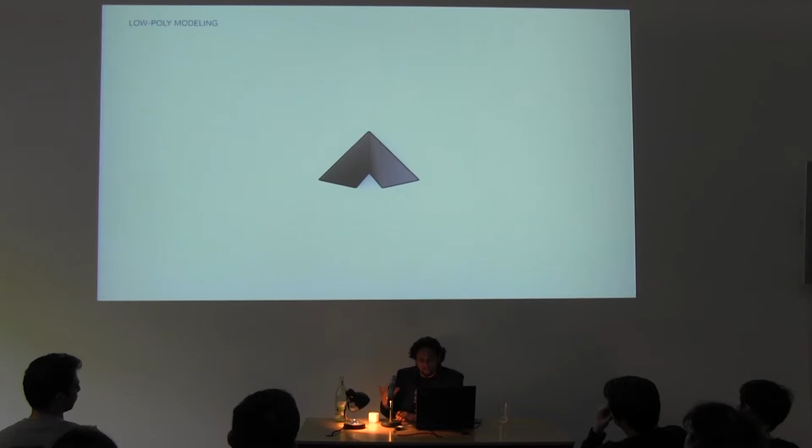Yeah, no, absolutely. I think that's a very pertinent question, that there's a sense that somehow computers erase the need for style, or even erase the mechanisms by which individual groups of people or companies develop their own authorship or ways of doing things. In fact, it's the other way around - it increases the possibility that you can have your own way. There's definitely so many more ways that you could customize the use of computers to suit your methods of working.

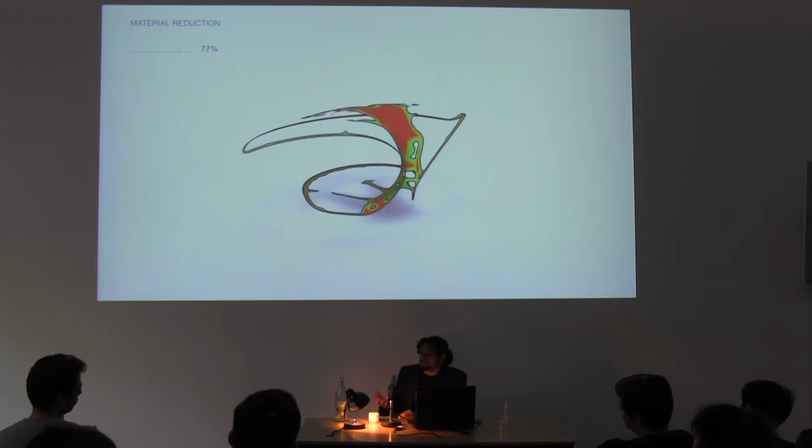What I find most interesting is that small young companies can compete shoulder to shoulder with big companies because of the use of computers. There's this, I don't know how many of you know of this small practice called Penda Architects. They're small in number, but they're huge in influence in China - he was a student in Vienna, and over 6-7 years, I would say they've captured Instagram in ways that bigger offices couldn't even imagine.

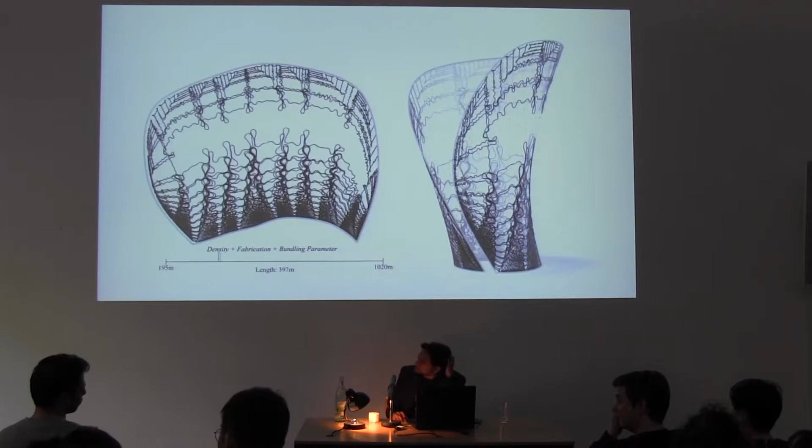And that's I think is the power of digital design and fabrication, that there can be millions of micro styles and micro genres, so it's unlikely that there will be a single unifying style. There will be many sub-styles - the Bartlett is very clearly different in the way they're using digital fabrication compared to the more continuous things that we are doing. They're more discrete or block-like.

I have a question about... I know that you said it's not possible to explain a lot, but it would be great if you could explain a bit about how the social principles that you had and how you came to that.

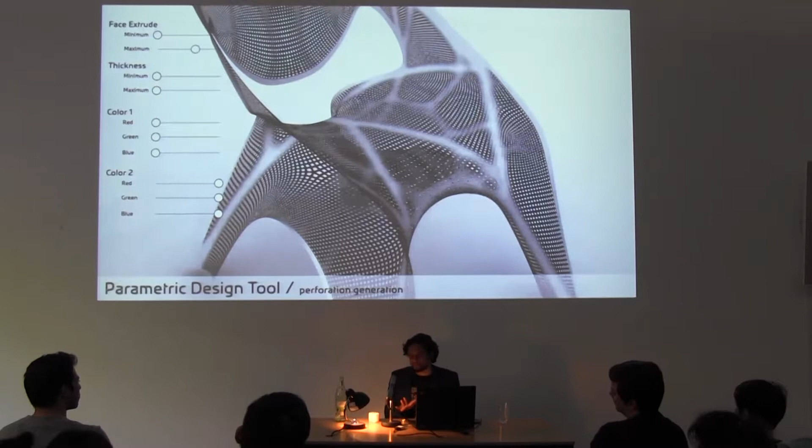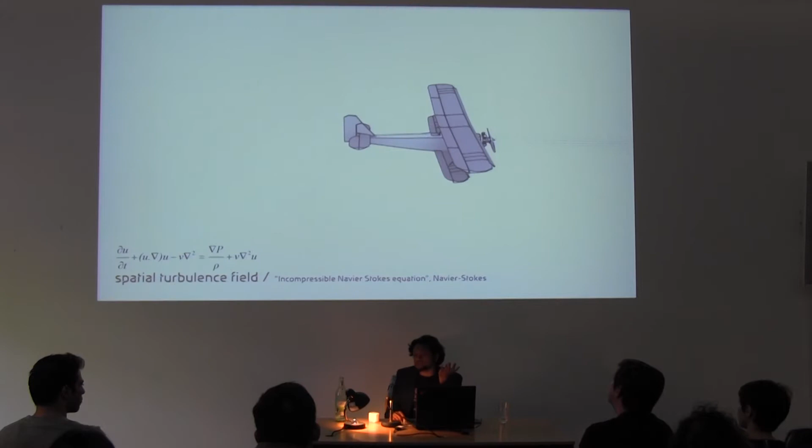Yeah, with that project, there was only a social intention, right? It wasn't studied in any computational way. But what was interesting there was that there were two groups, two communities of refugee children speaking two different languages, and the school currently that they go to, from 9 to 12 it's one language and one set of teachers and one set of students, and then they all go home, and then the next language and the next set of teachers come in. So there was a potential to study that, but the urgency of getting something delivered on site before the winter came in was so pressing that

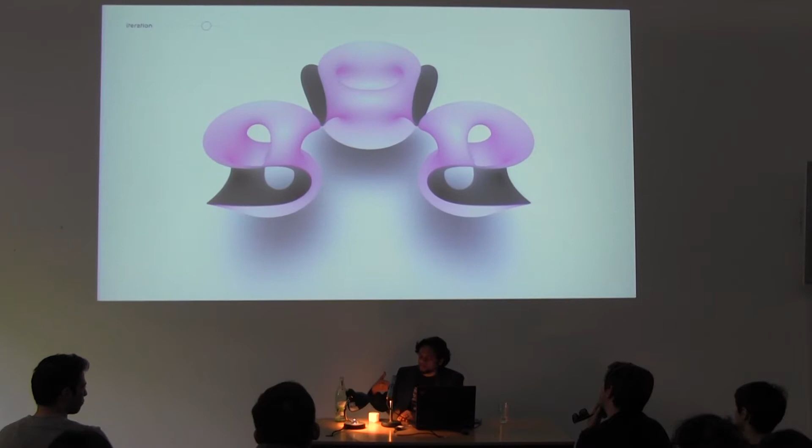we just did that intuitively. We said, okay, more importantly, the physical aspects of deploying it on site and making it cheap enough and easy enough to construct took precedence over the social aspects, which we feel like if that process could have been done many times, if that school could have been deployed in many places, there could have been a greater influence of the social aspects.

Because it didn't go ahead, we can only kind of see the physical side of things, which is interesting. It comes on site folded like this, the fabric already stitched, and then on site you just open it, and it stands because of the tension. So the physical side there is more interesting and more prevalent, unfortunately.

If you had time to come to a proper way to collect this information about the social aspects you need, how would you go about it? The closest thing that I saw was this website platform, Refugee Republic, which somehow shows the life in one of the camps in Jordan and what's happening, how people are using the spaces. That was the closest thing I could find as a source of information.

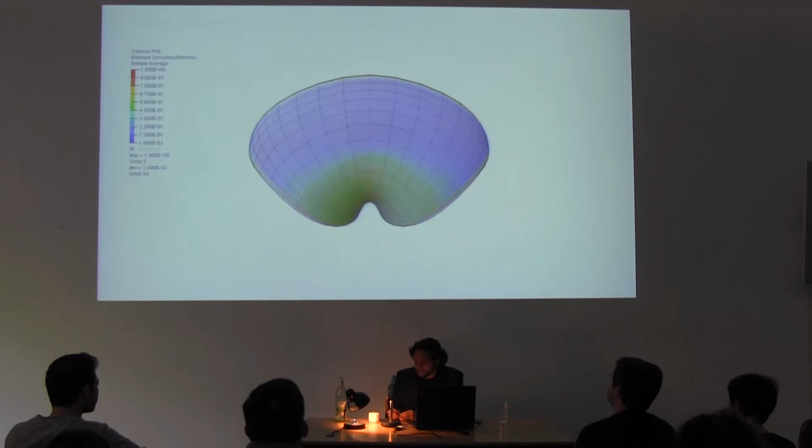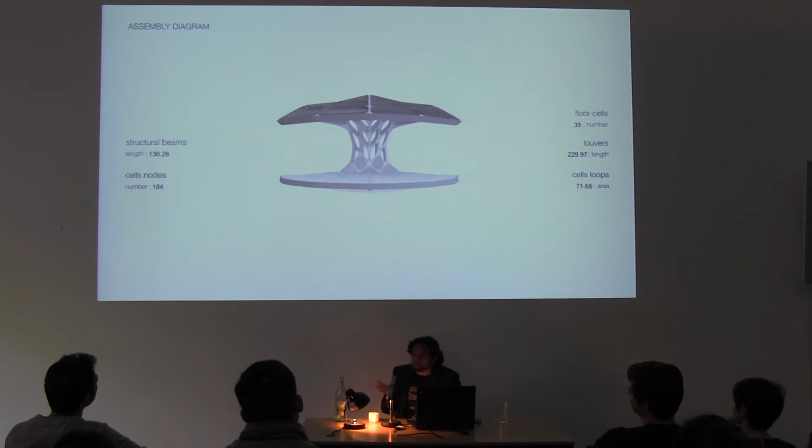The other social aspect to this is, unfortunately, because of legal restrictions on refugees, you cannot employ them to build their own houses, which is very strange, because then they become employed. So some of these technologies, in a way, could let people build their own houses again. That could be another form of deployment, but currently that's not feasible because of various legal or political philosophy questions. So that's not something we have as architects any control over, so we don't want to address that. But it could be one more way that the community is involved in making their own spaces, so it'll have its own unique expression of the same underlying technology.

It could all be fabric, but it will already be different in the fabric. People might put ornament differently, maybe stitch it differently, and so on. There are all these aspects that could be linked to communal aspects, but for various reasons, especially in more pressing situations like the refugee crisis, what takes precedence is just getting as many houses built. We already found it interesting, that's why we did it like that.

It was not a house, it was like a school, because usually no one talks about, in the refugee sense, that they need schools. They only talk about, oh, they need houses. But these camps are there for 6-7 years at least, so obviously they need to go to school.

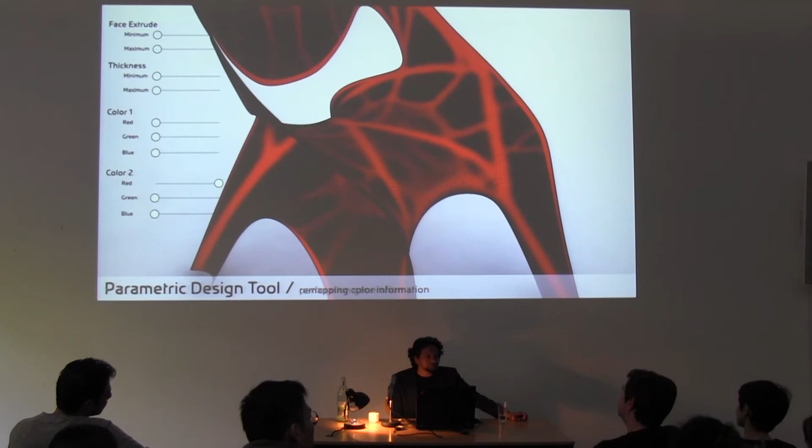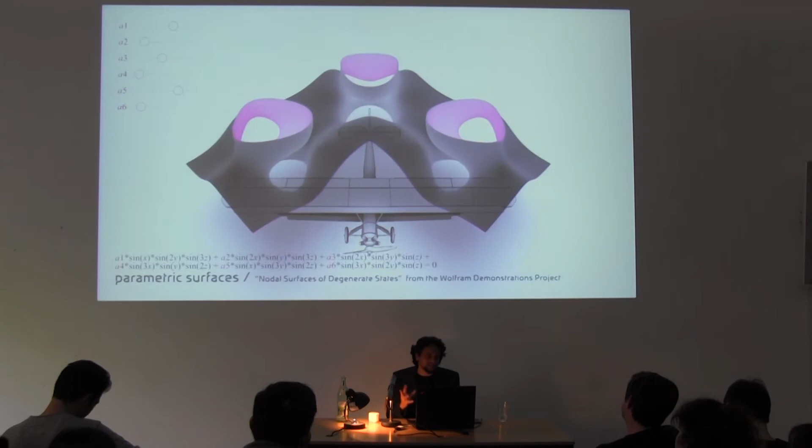When do trolls cancel each other out? There are all these sweet spots, right? When there are too many trolls, they have little effect, and we can already see that because they're creating so much noise that they drown each other out. But when they're only a small community of trolls, they seem to do the most damage. All of these aspects make it very interesting, and in many ways, we only have to tap into the technology and studies that are already happening.

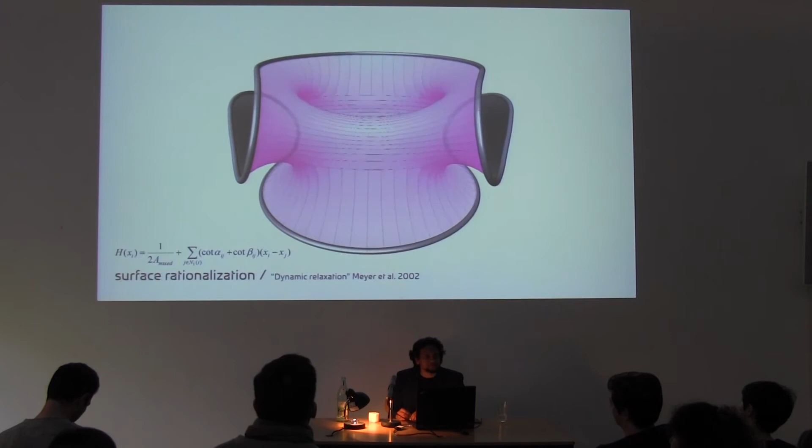Recently I met someone from the U.S. military trying to simulate how extremist groups, the kind of trolls of extremism, which of these extremists they need to take out so that the extremist group itself dies. So you can use the same nasty military technology for better use. Yeah, this is the same kind of effect.

To study it in a more positive way, the same - you could use the internet in good ways or bad ways. We think Tinder is a positive technology. They say Facebook is a positive technology. You could misuse it, or it could fall into misuse, but it could also really change the way we live.